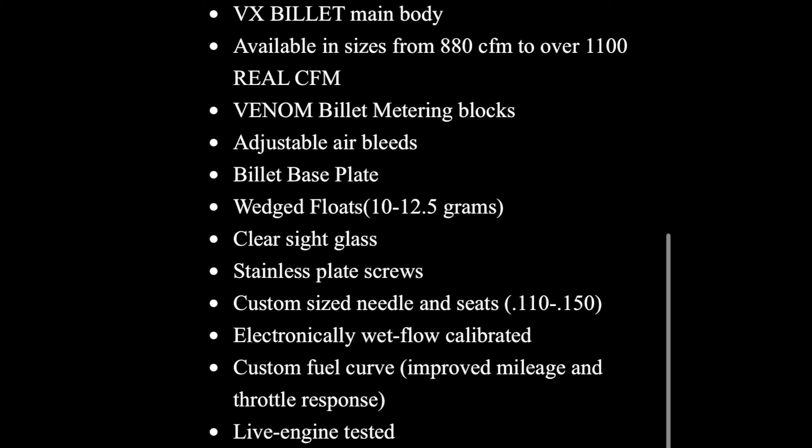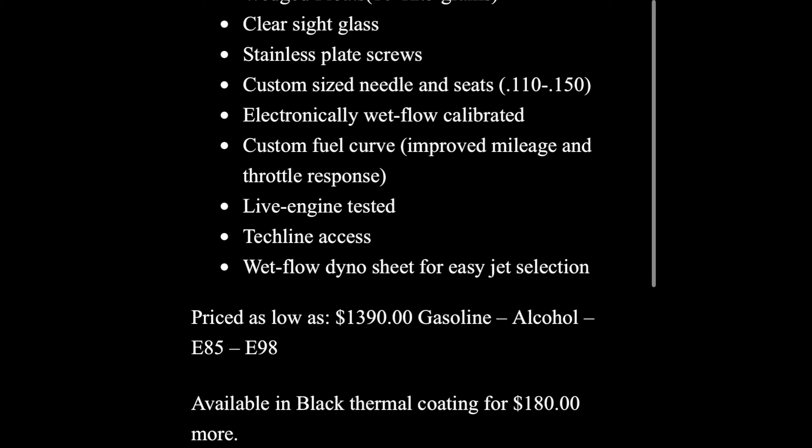So this was just as big a surprise to me as it will be to y'all. But our owner, Donnie, watched our video with David, and they were talking about needing more CFM. David even recommended a Dominator. We can't run a Dominator because he's running a flat hood on this car. So it's another limitation. You just accept your limitations and move on.

Don't forget, I will bring my 850 AED that I love so much and stick it on there just to see what happens. It's been a really good one for us, but this looks like it's got everything going on here. If you want to pause and read that.

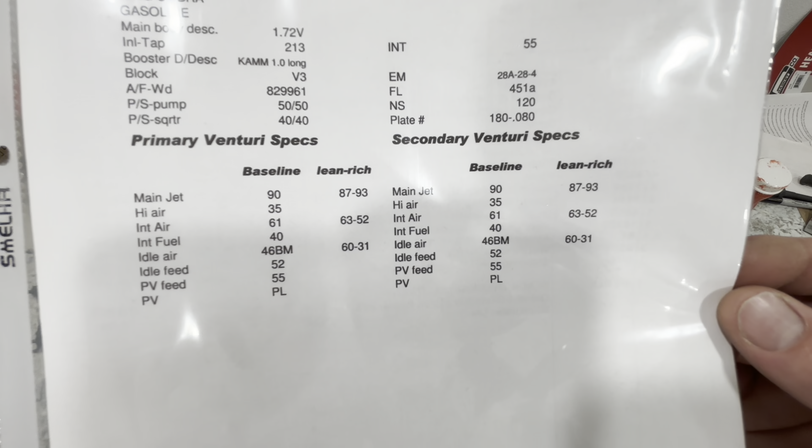Everything's there. Let's get it out of the box and check it out. I figured I could flip the sheet over and show you the specs on this carburetor if you want to pause those. Jet sizes, air bleeds, that kind of stuff. It says power valve PL. I'm not sure what that means.

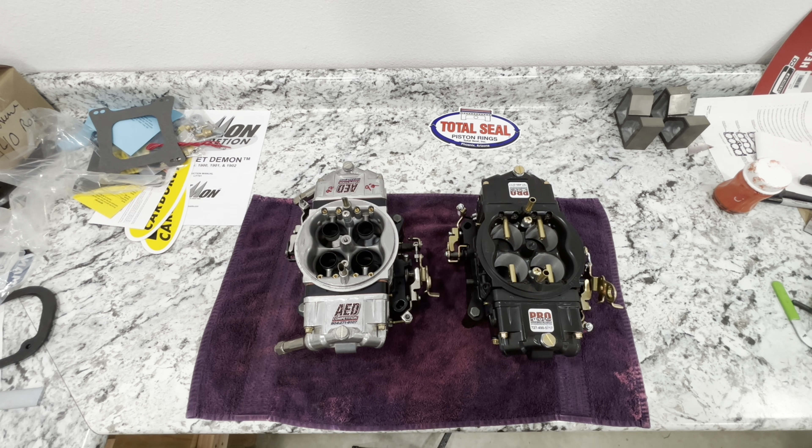Here's our two carburetors. I would like to see a power valve in this one because he is going to street drive it. I have a power valve in my race car carburetor right now, which this is traditionally my race car carburetor, but right now I've got that VRS 950 on that I want to tune some more and see how it works out. But to show you the main differences right now, it's these boosters.

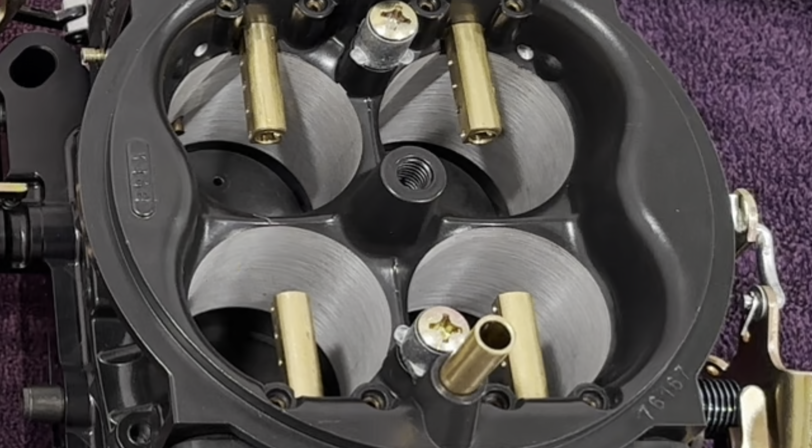Check out that straight booster. That's the main thing that jumps out at me. Also, the milling that's been done inside these venturis here. Should be able to pick that up on camera.

Then we have some added tubes coming through. See on the back there. See on the rear here, these tubes that come in. I'm not smart enough to tell you what that does, but our AED with these annular boosters, I think really what it's going to come down to is what the engine likes more, in a sense of fuel atomization.

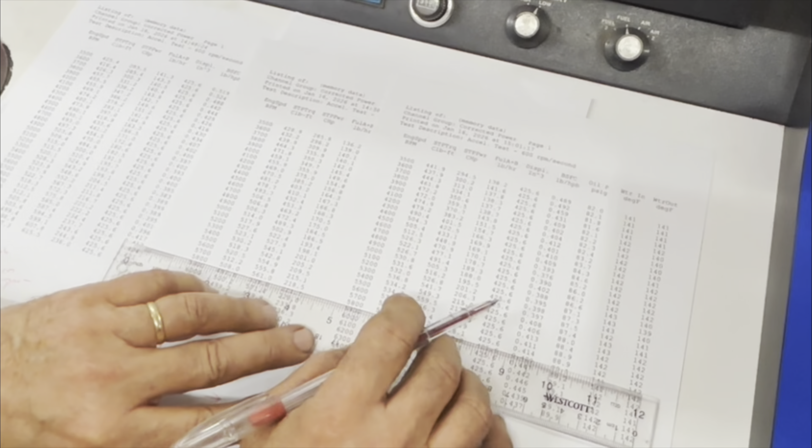So if the annular booster atomizes better like it did on that 426 Hemi, we put this on the 426 Hemi against the down leg booster 950 XP, and it killed it. Like 25. The AED definitely is better, and it's not just jetting because we're not off that much now.

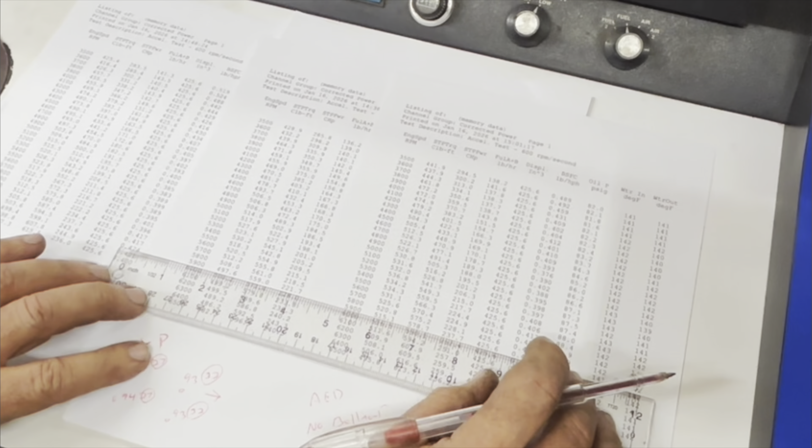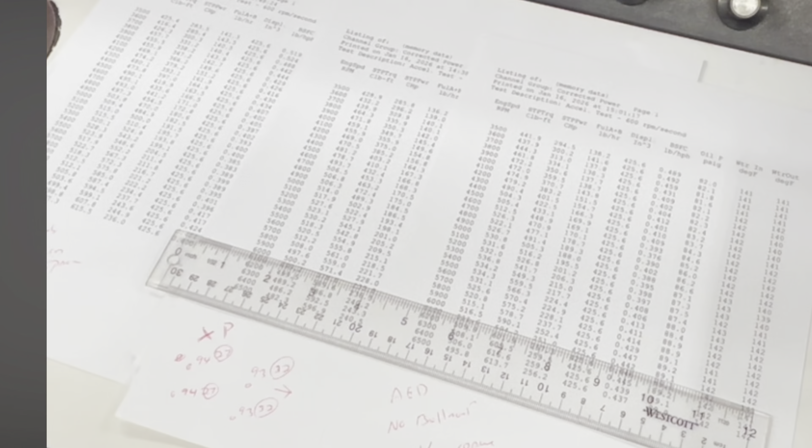Yeah, it's not huge, but you got a heavy car, man, I need that. You need that torque. Yeah, it was a massive, massive difference.

So this booster style might actually work better at wide open throttle. They have Pro Systems, the name for a reason, but which one's better for the drag and drive lifestyle? I'm not really sure. I'd love to hear your comments on it.

We'll just have to see how it drives on the street once the dyno testing and the cam challenge is over with. But I just wanted to point out, we basically start with the exact same base plate here, the same butterfly size. These are both 1.7, 34, 35, same thing.

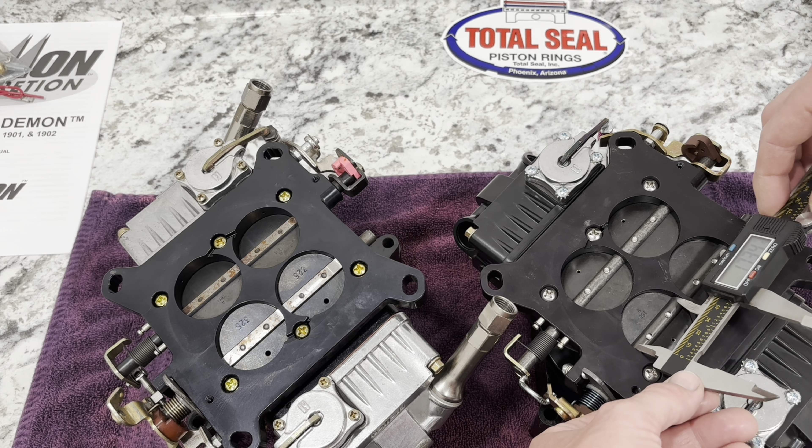But they're getting over 1100 CFM of flow with this, and I think a lot of that includes, one, this has been milled out, and I'm going to attempt to get a measurement on it. I can't really with these Harbor Freight calipers, but I can try. The other thing is the booster blocks less of that path, so it should be able to flow more air.

It makes sense, and it's not hanging out like the big annular is, but it'll be very, very interesting to see that dyno comparison on our 538.

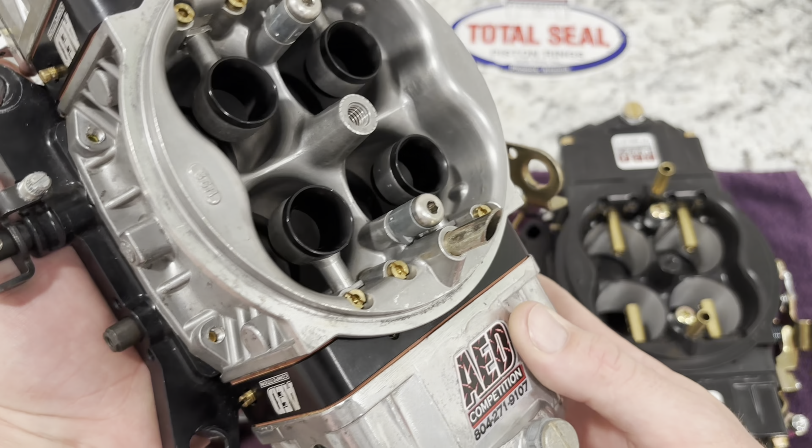So to summarize, they do have that listed as a street strip carburetor. It'll be exciting to see.

I'm fully well and capable, I wanted to put this out there, of building this engine, running this engine, timing this engine. I'm gonna need some help to get these carburetors tuned, obviously, but I want to put the information out there for you. I want to bring it to you as honestly as I can. And I want to do something for the big block Mopar world, actually get us a real camshaft test going, and all of it's good information.